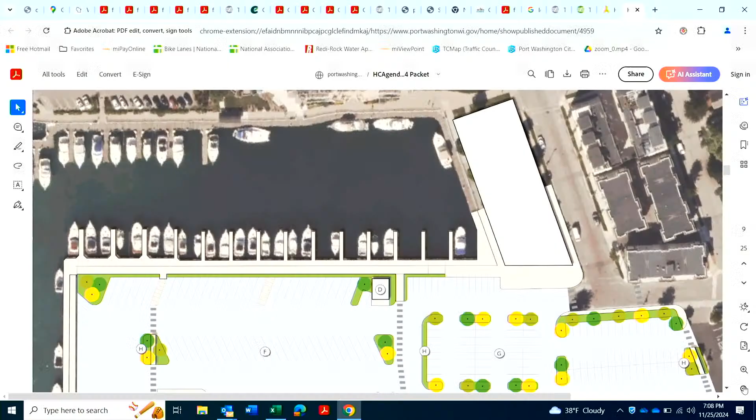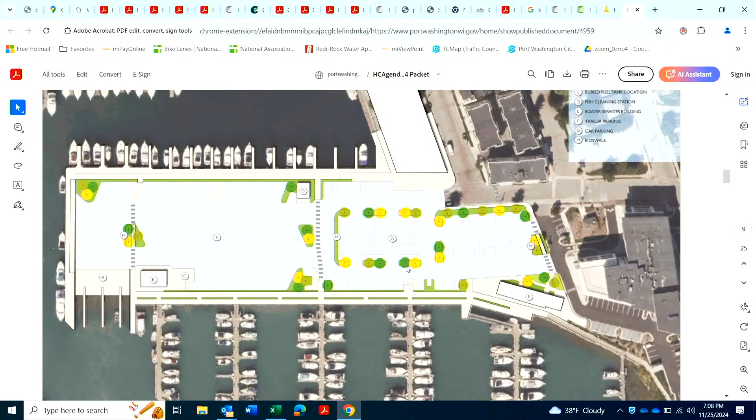So this first concept that we looked at was kind of a minimalist approach. This is the parking lot as it is today. It adds a couple of landscape islands out here and out here, and then a few more around the perimeter to provide area for drainage. It was something that we didn't feel was impactful enough, so we did not pursue this any further than the day it was presented to us.

So this is the next plan that we looked at here. This dark gray area, these are our pervious pavers, essentially like you see in the Newport Shores parking lot. That would be in all the parking spaces along the edges. These green areas would be treatment areas, so the water would flow from the pavers into these treatment areas.

Now, the thing to note on both sides in this concept plan is they moved the retaining wall on both sides, so we lost the walkway on both sides. There's a concrete walkway and then the boardwalk. We didn't like that solution either. We felt it was too important to have this concrete walkway, especially along the west side of the parking lot.

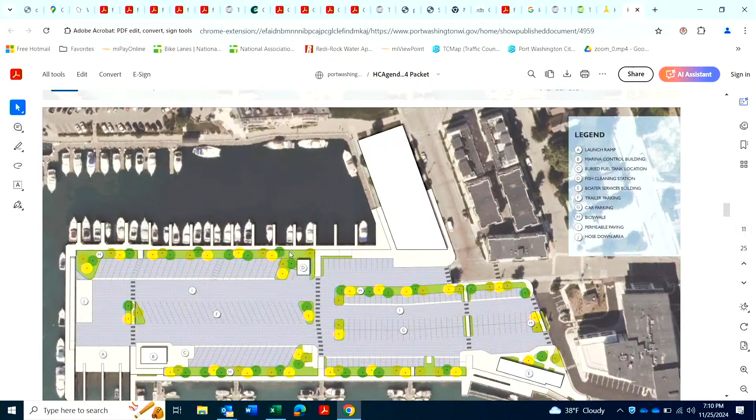And so we moved on to our next option, and this was one where it's all brick pavers in the parking lot. We felt that this was going to be cost prohibitive.

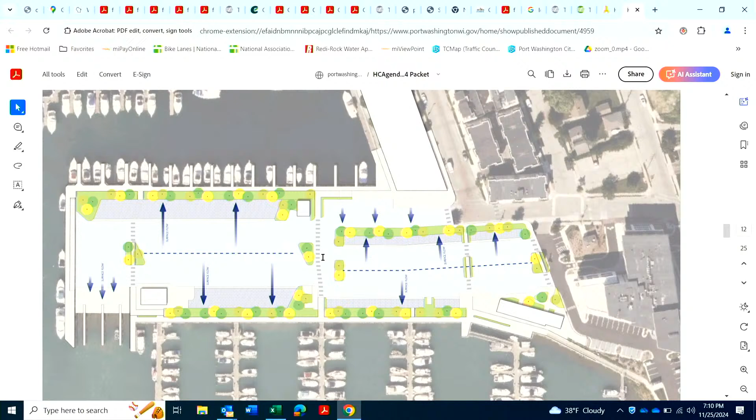Moving along, we looked at one - let's see, no, that just shows the flow diagram, okay. I want to get to, okay, here. So we have a couple of preferred solutions that we're looking at more closely.

So this first one, we left the retaining wall in place along the west side. We removed the curb, and there would essentially be parking barriers - just wheel stops along here - and then adding dimension to the vegetated area. This adds about 33% more by creating kind of a triangle look.

Let me zoom in on it a little bit so you can see it just a little better. So rather than having just a 3-foot strip along here, by adding this triangle here, you get about 33% more area.

It does move the retaining wall on the east side. So this retaining wall that's currently along here would be out essentially, so that the walkway would only be the boardwalk along this side. And again, drainage areas on here.

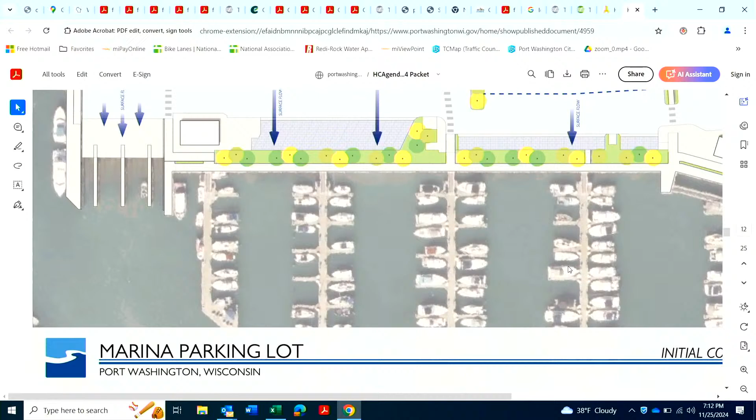As shown here, the drainage would drain towards the pervious pavers and into the bioswales, where water would be stored and treated in the swales.

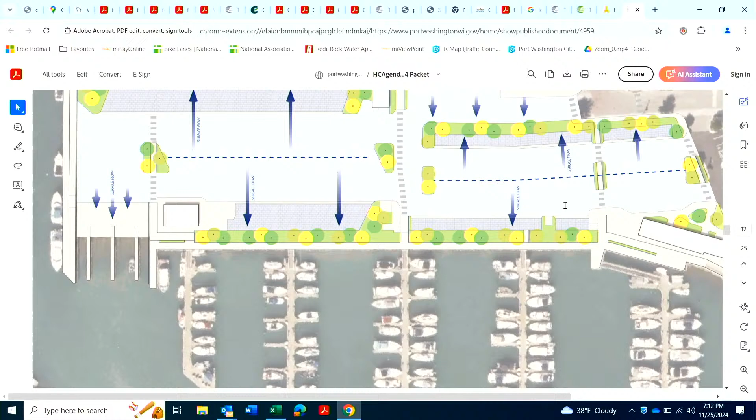This one also adds kind of an articulation - sorry to bounce around, but the parking lot has a slight angle in it here that's not reflected in the current design or layout. So we were going to take advantage of that and just articulate the parking on the east side as well, to reflect what's in the center.

So the estimated cost that they provided for us, again these are very rough figures, was $2 million. Our original estimate for just resurfacing the parking lot was about $500,000. So we're looking for ways to trim that cost.

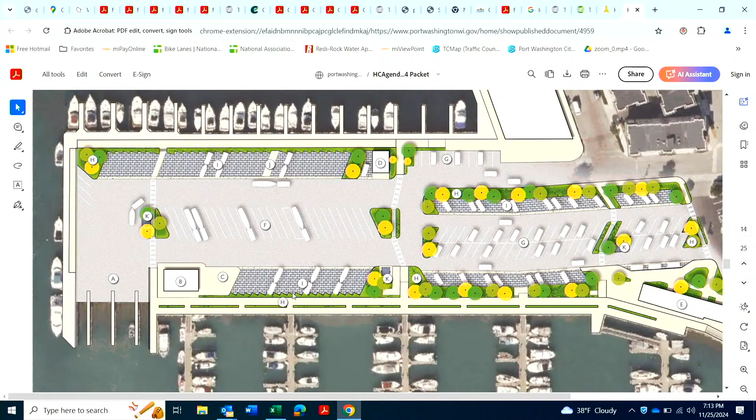And so we looked at two more options - one with only moving the retaining wall over here and keeping this here, but wait, did they provide it? Did I skip over it, or did we not? Or did they take it out on both sides? No, sorry, they took it out on both sides, I believe, after our last conversation. Yeah, okay, oops, they might not have included that.

So this was another option we were looking at, angled parking, in order to preserve the retaining wall in place, to preserve this walkway, and to get the same amount of treatment as the other concept, at least in this area, but this one doesn't encroach onto the walkway.

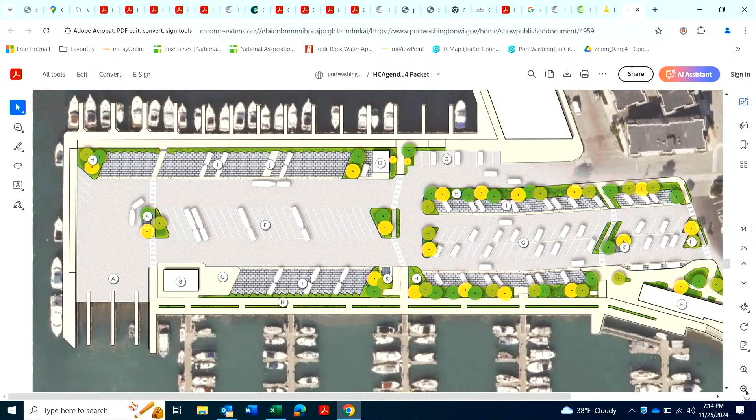The only problem with this one is adding angled parking removes about 25 spots. The parking counts here are 140 for car, and then 115 for car in the concept, so that was a reduction of 25 spots. We felt that was not what we were looking for.

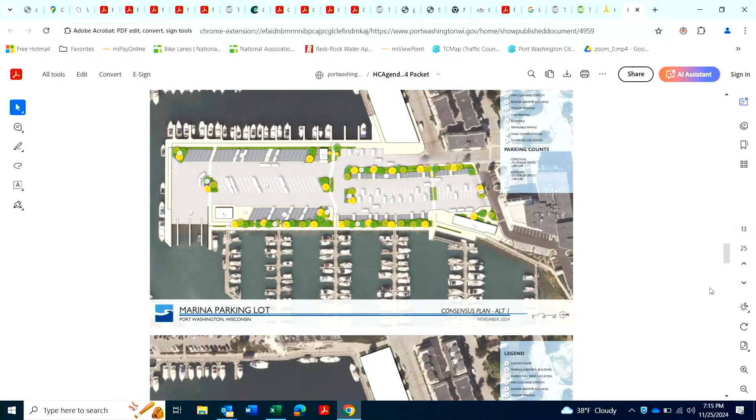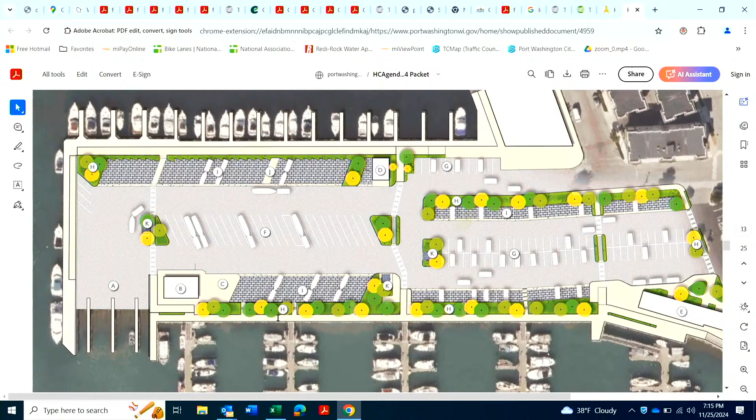So we're focusing mostly on this one, where we have the retaining wall moved, or one where we don't move the retaining wall at all, and see how much treatment we can get just from the brick pavers in the parking lot, and then this bioswale, plus the minimum amount of bioswale on both the east and west sides. We're still waiting on the pollutant loading, and with this concept we're at roughly the same parking counts as the current design.

It actually adds one trailer spot, and then you lose two car parking spots. I'll zoom in a little bit here.

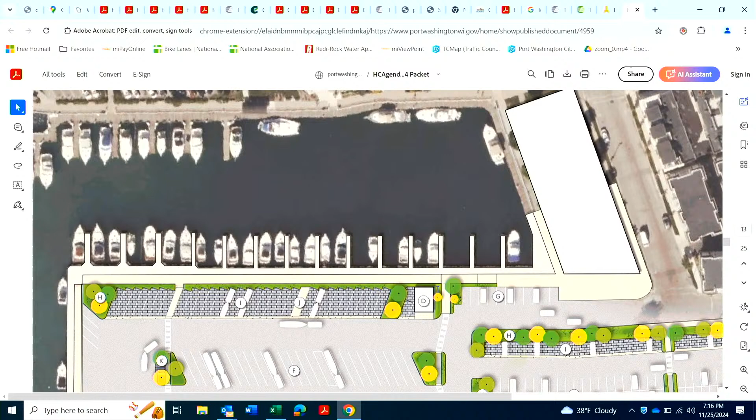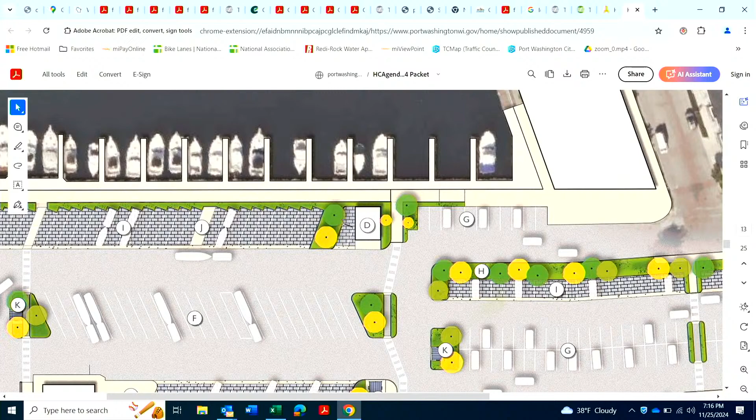You might notice around the fish cleaning station - this is what they're working on for final engineering right now - adding a best management practice here, which would just be a bioswale. There's a stormwater inlet there, so the water would drain into the permeable pavers and then into the bioswale. This shows it a little bit better right here.

This is what we're looking at installing as early as next year, depending on the funding. This is right here in D, the fish cleaning station, having pervious surface here and then draining to this bioswale. That would capture the water that's sitting there constantly now, improve the appearance of the area, and treat the stormwater.

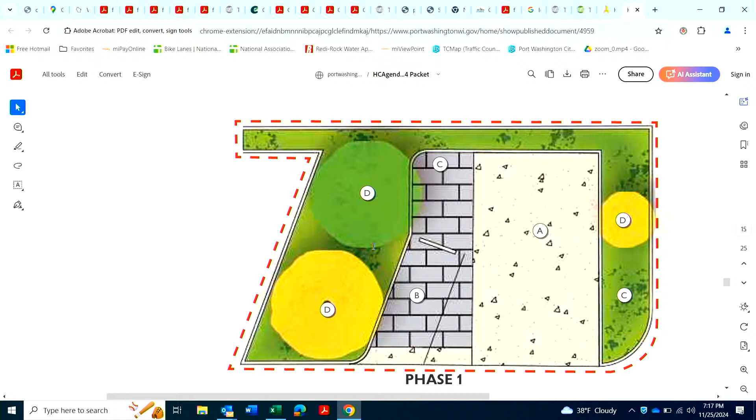We'll be taking some soil borings probably in about 2 weeks. We've had a firm hired to come out and take soil borings to give us a better understanding of the amount of treatment we can get out of essentially permeating the water into the subsurface.

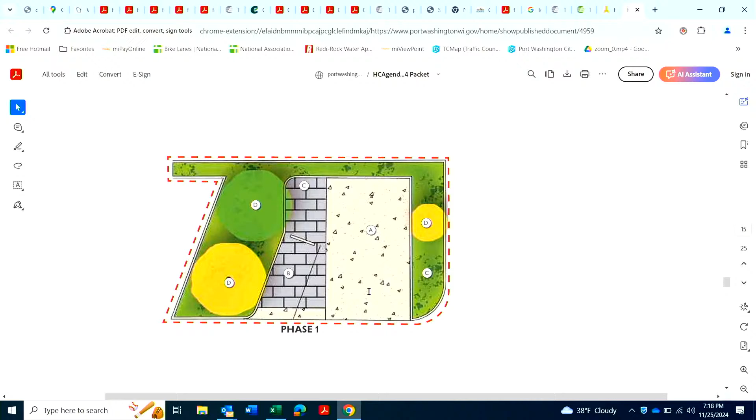So in a nutshell, this is what they're doing the engineering on right now, labeling this as phase one. This will be a full engineered set of drawings, nothing too complicated, but for treatment of the water that's sprayed off of the fish cleaning station, and then looking at... oops, not that one.

If we didn't have it, it would look something more like how the west side's represented. And Roger, our city engineer, is here. Did I miss anything?

They weren't goals of the project, but they kind of happened as we started moving things around. You can see there's 2 crosswalks across the parking lot, so we have a little bit better pedestrian traffic for people moving across, where currently people sort of haphazardly walk across. And we are getting a drop off in front of the north building - you can see 3 spots there.

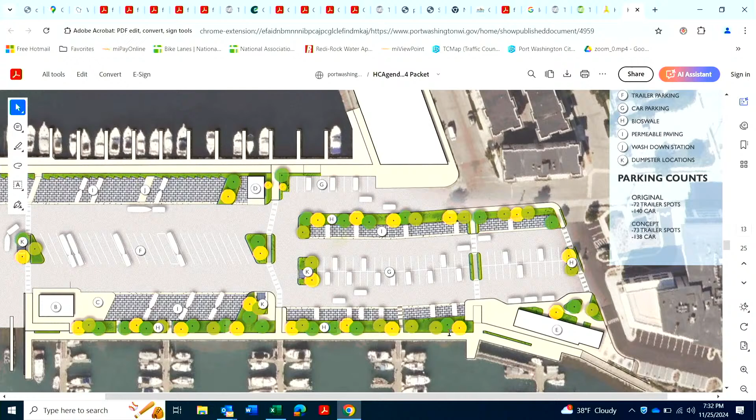Okay, anybody? Mike? I do have one more question, so I guess I lied when I said I don't have any more. On the consensus plan, alternative 2, with the angle parking for the car parking area, with it being angled, were those spots long enough that they could be overflow trailer parking, or are they still too short for that?

So you're saying these in the middle? Could those be trailered for days you need a trailer? I think they'd have a hard time pulling back out to make the turn, but it would be nice to have some spots that are flexible, that could be for passenger cars but also could be trailer parking at times.

I like the idea. I think the problem is, like you're saying, you'd be going against the flow when you exited, unless you just reverse, went backwards. I think it would mess up your flow. Make them all back-in spots? Right, I was thinking of that too.

That might get complicated. Well, typically if it's a busy day there's going to be no room there anyway for trailer parking - that's marina parking tenants. If it's that busy, there's an overflow in the fishing lot too, usually on a weekend, and that lot is full. So it's never been considered for trailer parking.

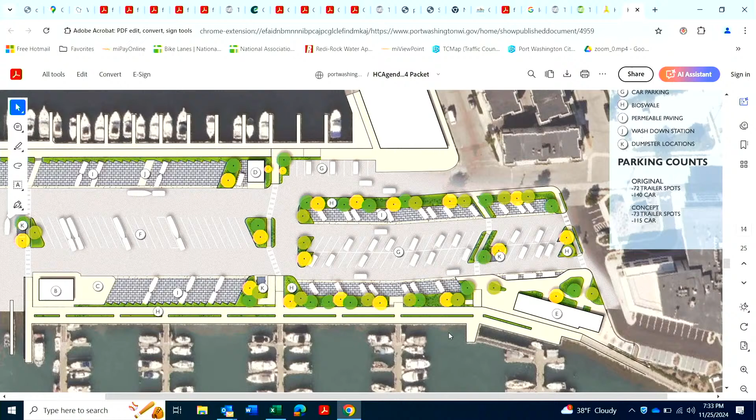Oh, I had that on, I thought it went off. Okay. Anything further, anybody? Rob, thank you. You're welcome, appreciate it.

Move on to item 6, the information on the approved 2025 budget. Sorry about the late delivery of the 2025 budget, but basically it's the same as we've done every year, increased what we feel the future is going to require. If you get time to look at it and have any comments, feel free to raise them. This has been reviewed by the treasurer of the city, so he's made some updates, nothing significant.

Did we get any feedback from the DNR about raising launch rates? We haven't applied because we're still thinking about doing that. So that would be for the 2025 or 2026 season? 2026, because our budget was already in process when we discussed that at the last meeting. So prior to the 2026 budget we'll go through that. Didn't you have a number that they said was maximum?